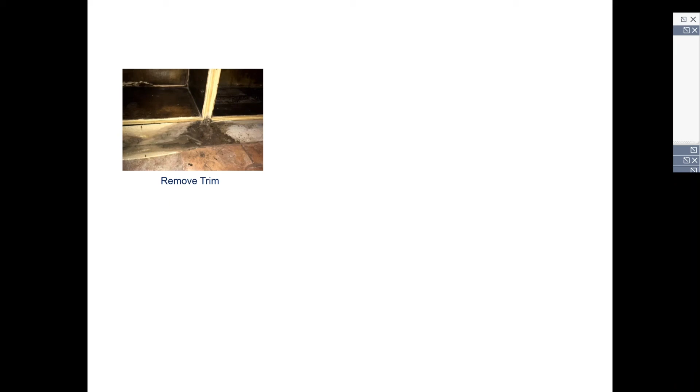Next, this is a build. So you see that there was some rotting going on in the bottom shelf, and so we decided that we needed to pull the books and pull the trim, and here's what I found behind it. Next slide. So we removed the trim. Next, just keep clicking through this, and exposed the drywall, exposed the batts, exposed the framing.

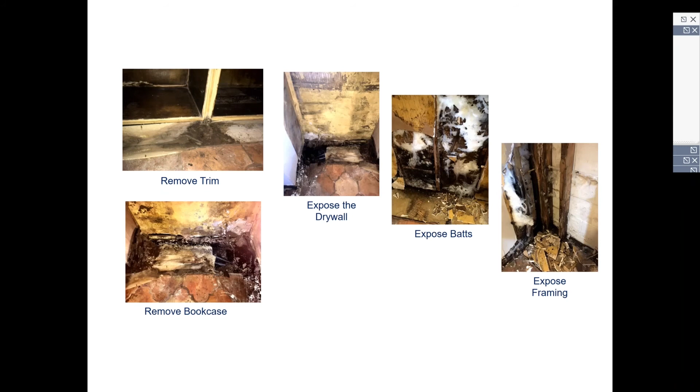This is a concrete masonry wall, and so a little bit of moisture, next, came in through a corner, and you see that the heat pump slab was sloped toward the corner. So when it rained heavily, we would get just a little bit of water, but it had no potential for drying out, and it caused all of that damage you'll see in the next slide. A little bit of water can create a lot of havoc in a home.

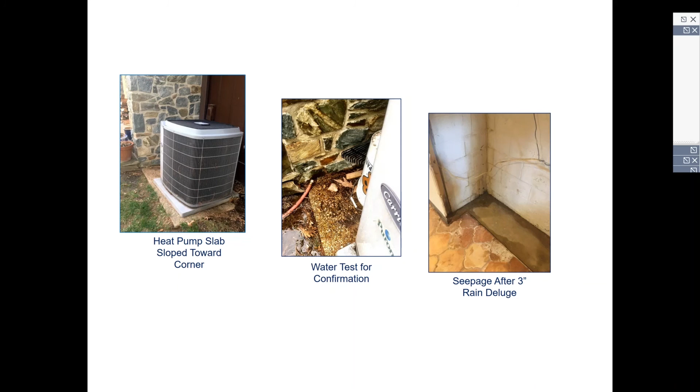Next slide. Yeah, so that's what we experienced, and that's what a lot of people have in their homes, these kinds of factors that can negatively impact health.

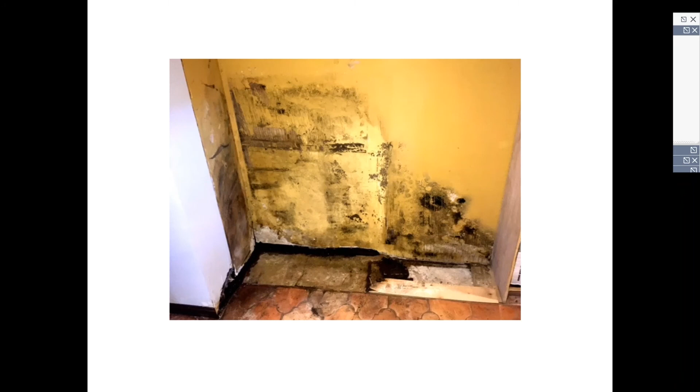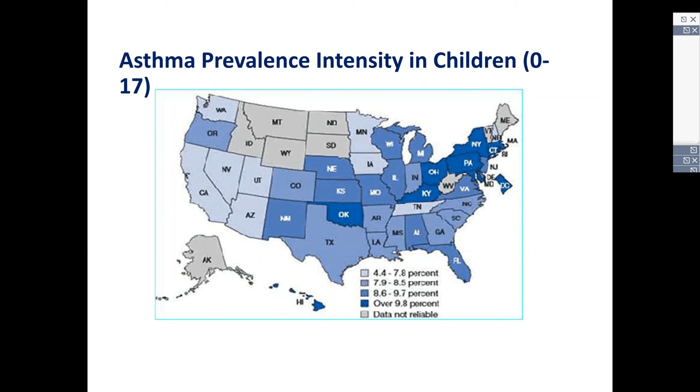And why is this a problem? If you look at, say, for example, asthma prevalence and intensity in kids under the age of 17, you see those darker states, 10% of the population has asthma, and that number is growing across the country. So we need to look at what the impacts of this are. You can go ahead and click 2 or 3 times.

One more. Oh yeah, and so the impact is that it can have a tremendous financial impact, both in terms of direct costs and also indirectly in terms of days missed in school, days missed from work when you're taking care of a child, and then of course there's the emergency room and hospital stays. So asthma is very important.

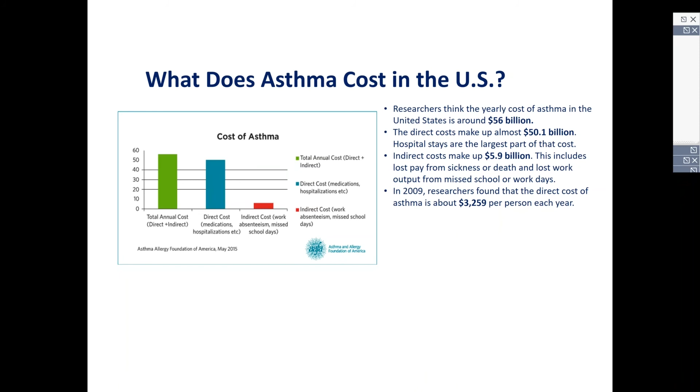We decided that we need to understand what the triggers are that may cause it or may cause the incidents to occur. Next. So with a lot of help from people in the industry, including the Green and Healthy Homes Initiative, we created the Healthy Home Evaluator credential 3 years ago and brought it into the market. Now this is a pretty high level credential. It does require a diagnostic prerequisite certification like the building analyst. So it's not something that's aimed at, say, community health workers or in-home nurses, but I'll get to that in just a minute. Next.

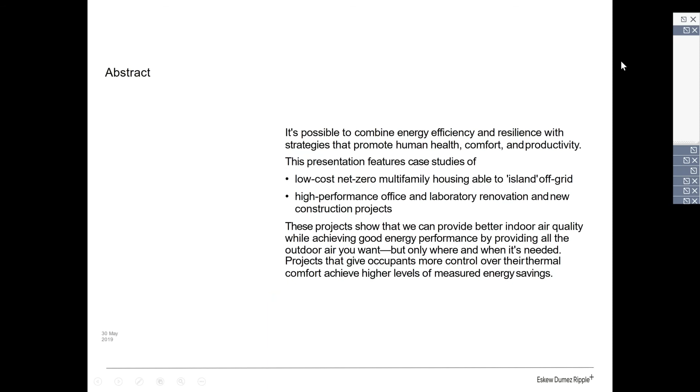Thanks for this. Next slide, please. And this is just the abstract.

We'll be getting at the end of this session to a few case studies, but because I know this is ACEEE and we're ultimately interested in issues around energy, I'll be talking about 3 cases that cover very different building types, showing that you can combine conditions that promote occupant health and productivity while still achieving pretty good energy performance numbers. We'll be talking about a LEED Gold laboratory building, a design for WELL certification office building, and a multifamily housing project under construction now that is targeting net zero with off-grid capability and Enterprise Green Communities certification.

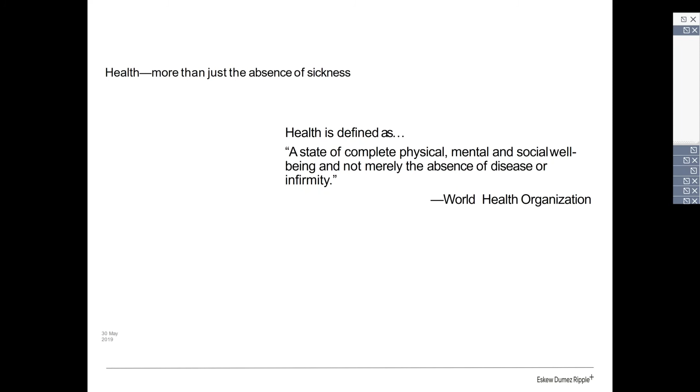Health, increasingly, is not just about the long-term implications of what health really means, but in fact what matters is the short-term, chronic, and immediate impacts on the well-being of building occupants. That can be not just about not being sick, but about promoting well-being and productivity. We're finding as architects in our own practice that it's this impact on day-to-day productivity and sense of well-being that is really driving what we used to call sustainability and energy performance—the energy performance comes along for the ride if we design for health.

So just to review, what do buildings need to promote occupant health and productivity? Obviously, we want to provide for thermal comfort.

This is especially important in larger buildings, not so much single family homes. We are constantly battling facility operators who think the way to make a great building is to put plastic boxes over all the thermostats and keep those pesky occupants from touching things. Our experience has been that your occupants are smarter than your building management system. They know when they're comfortable, and if they're messing with the thermostats, it means your building is malfunctioning. As one building commissioning agent told me, in 30 years of practice he's never had a case where making people more comfortable made the energy use go up. It almost always makes the energy use go down.

The second issue is good air quality. What we're finding is that the standards in place for ventilation and so on are actually woefully out of sync with the current best research on what it takes to promote good occupant well-being. We obviously want to control relative humidity, because high moisture situations can promote mold, and mold is the leading cause of lawyers in the built environment, so we need to pay attention to that. For laboratories, which are typically very high ventilation and therefore high energy use building types, we find that giving occupants control to set ventilation according to what's appropriate to the work they're doing can have huge energy impacts that improve their comfort as well as improve the energy performance.

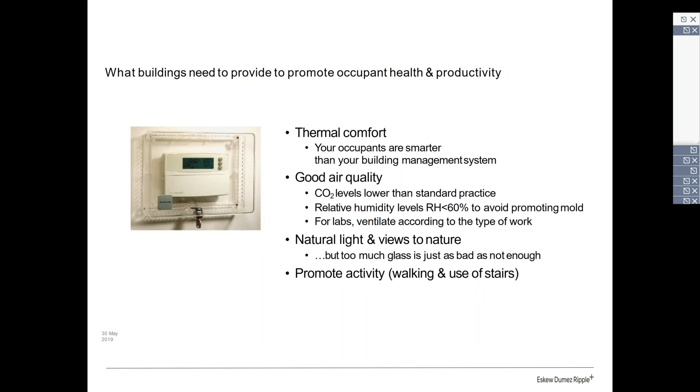We also know that buildings need to provide natural light and access to nature, but architects who try to do this by just making glass boxes are actually making the situation worse. Finally, one that's a little more subtle is promoting activity. We're such a sedentary, overweight society, and things that can promote more physical activity in buildings, like just making stairs more inviting places, can make a big impact on occupant health.

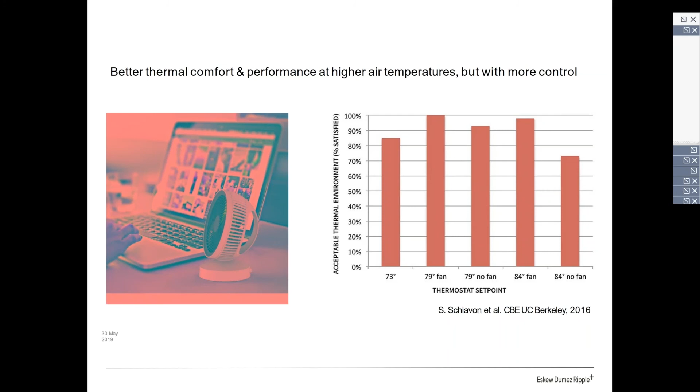There's some recent studies that are quite interesting on that thermostat issue we talked about. Berkeley has shown that building set points where the ambient temperature is much higher than what we're used to thinking of as the comfort zone actually promote the highest level of occupant satisfaction and the highest productivity in offices, as long as we give people control of the rate at which air is moving in front of them. At the desk, if you have individualized small fans, which are very low power, a few watts each, you can deliver much higher productivity and comfort with an ambient temperature in the summertime of as high as 79.

And in fact, recently in the news, it's become an issue - a gender equity issue. A recent study coming out of Germany shows that the test scores of men might be higher at lower temperatures, but women are especially significantly negatively impacted, even at the same level of clothing, due to differences in metabolism. So the best thing to do is provide a good ambient temperature and give people control over the rate at which air is moving over them, so they can control their perceived cooling and temperature. That also happens in air conditioning dominated office environments, to save energy.

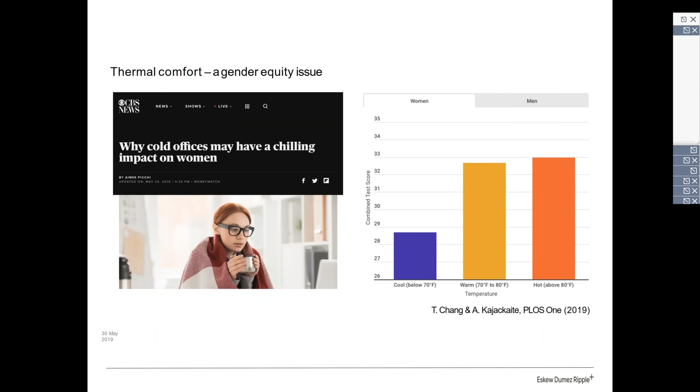The other surprising bit of research that's really changing the conversation is sometimes called the Harvard study or the COG-FX study, the cognitive function study. At a facility in Syracuse, New York, they built uninviting windowless cubicles, but underneath each one they were able to manipulate the carbon dioxide levels, volatile organic compound levels, temperature, and airflow, then study how knowledge workers perform as you vary these conditions in beautiful double-blind studies.

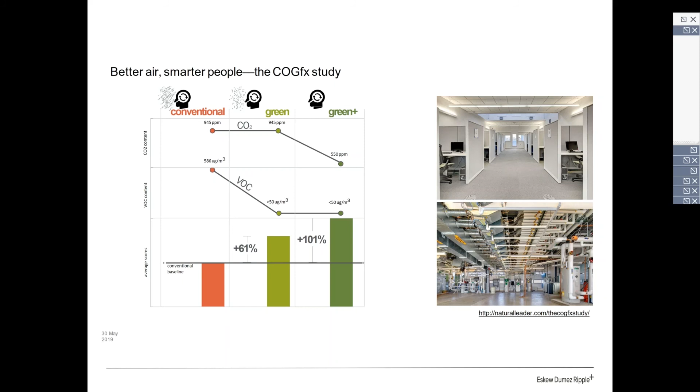And the results are stunning. They found that performance on the most challenging knowledge worker tasks can be almost doubled if we get the VOC levels lower and get the indoor carbon dioxide levels lower. If the middle bar is green, which is typical of what you'd achieve with a good LEED certified building, green plus is that plus a higher level of outdoor air to lower the ambient CO2 levels.

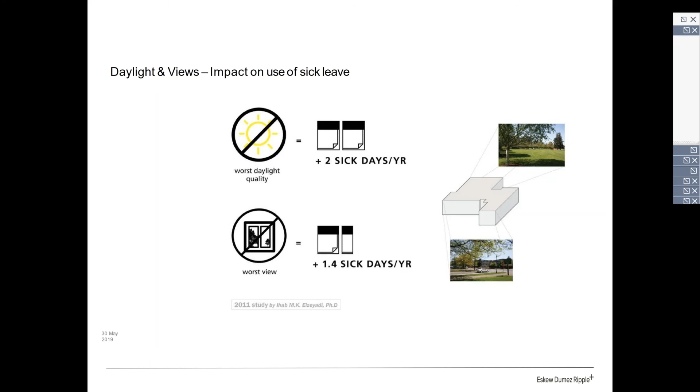And productivity is both higher, and the rate at which service can be provided to clients is also higher when you provide good daylight and good views.

And this translates also to schools, where controlling for all other influences, they find that students progress 20 to 26% faster year over year on tests in the rooms that have the best daylight and views than those that have the least.

And daylit stores experience higher sales. It depends on what the business type is and what the price point is in the stores, these impacts vary.

The financial benefits of these are significant—20 years ago, we talked about daylighting as a way to save energy because we could turn down the electric lighting. Daylighting is a way to unleash retail sales and worker productivity, and the energy savings just come along for the ride. So some case studies just to show this in action.

At the Dalney building at Georgia Tech, this building is opening next month. It's an office building where their original perception was they were building a parking deck, which would free up a lot of area currently covered in surface parking and make a nice green space in the heart of their campus. But then they were sort of embarrassed to have a parking deck up against their eco commons, so they said, well, we'll put an office building, glue it onto the side of the building.

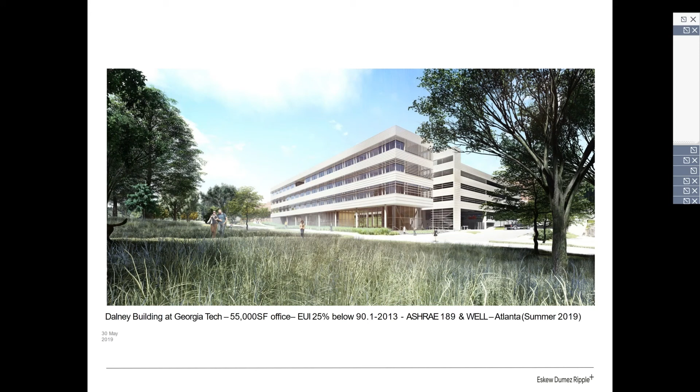But what we did was, instead of laminating a building, we actually proposed pulling the building off from that parking deck, allowing things like cross ventilation and daylight from two sides on this incredibly long, relatively thin bar. So it's an open plan office workplace with just 40 feet from window to window, allowing for great daylight and great ventilation.

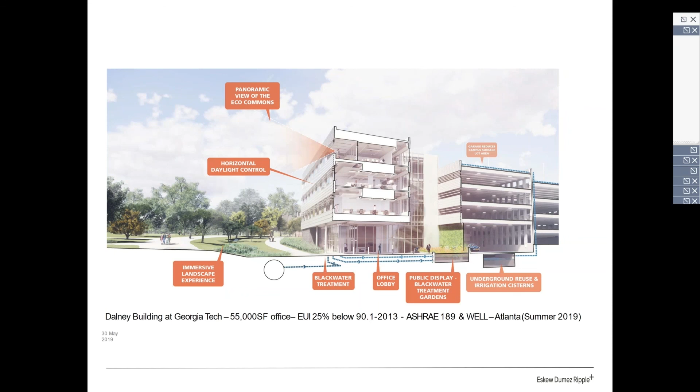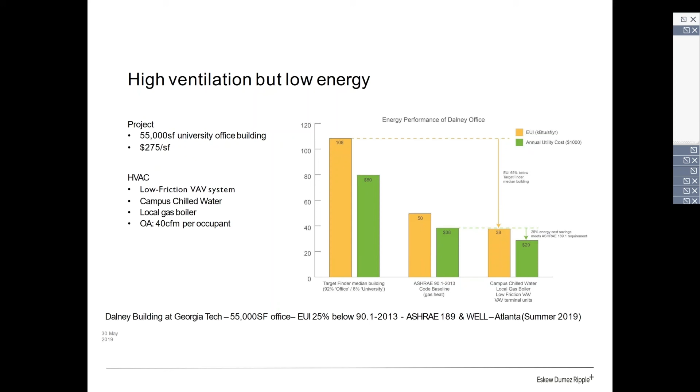Through an application of what we call a low friction VAV system—the kind of mechanical system they're comfortable maintaining at the campus through central plant people—by designing larger ducts with slower turns, along with other measures, we achieved a very high level of environmental performance, including qualifying for ASHRAE 189 certification as well as WELL certification, even though this building provides more than double the typical amount of fresh air per occupant. And it's doing it at a cost of just $275 a square foot, which is very low for an academic office building.

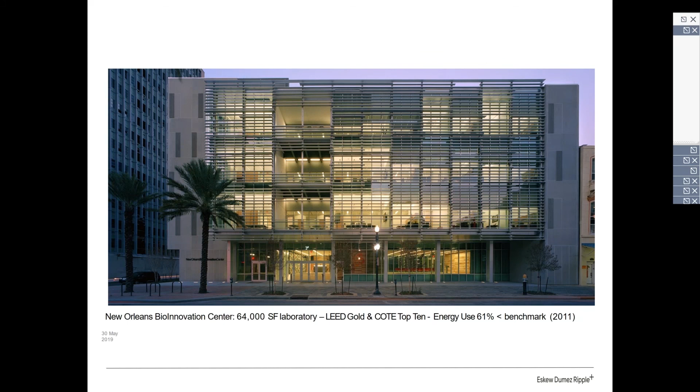The Bioinnovation Center here in our home city of New Orleans was completed in 2011, and it earned a COTE Top Ten award as well as LEED Gold certification. Its measured energy use is 60-61% less than typical laboratories, even though we live in a very humid, hot, challenging environment.

And laboratories tend to use lots of air because to keep people safe in case somebody accidentally tips over a container with some solvents in it while doing their work, when they should be doing it in a fume hood, sometimes people walking around a lab might spill something. So the easy thing to do is to just move a whole lot of air, sometimes as much as 12 air changes per hour.

However, this is a biotech startup incubator building where there's all kinds of different research happening. And so in each 1,000 square foot laboratory compartment of this building, we actually allow each tenant to set the ventilation policy appropriate to the kind of work they're doing.

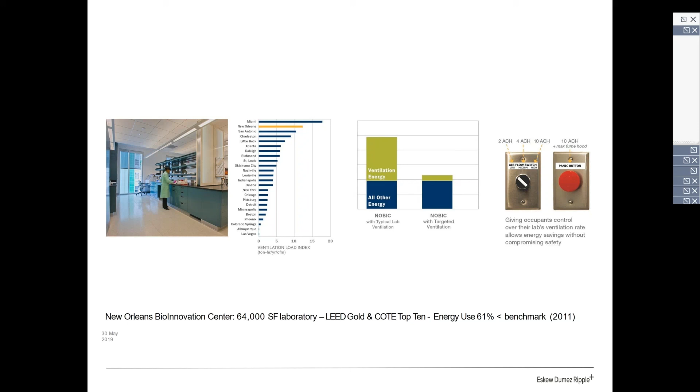As you can see in that middle bar chart, the energy implication of allowing the people who need a lot of ventilation to have all the ventilation they need, and those who need less to have less, allows tremendous energy savings. And in fact, the measured energy use of this laboratory, per square foot per year, is the yellow bar for this building, compared to the typical lab is about one-third.

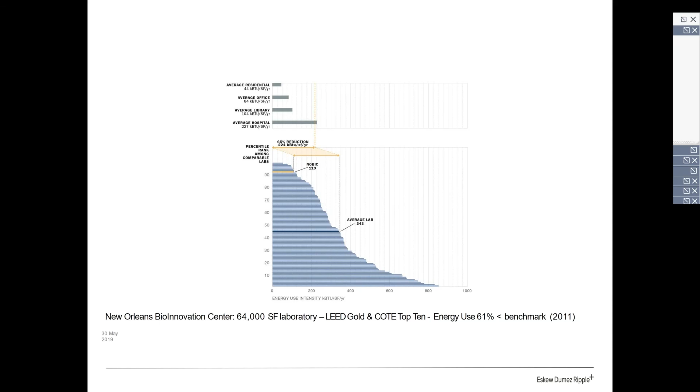And laboratories, as we say, are huge energy users compared to things like residences, offices, and so on. So these kinds of decisions of empowering users to make smart choices has huge impact.

Finally, this is our net zero multifamily housing project currently under construction here in New Orleans. This is a 50-unit apartment building targeting supportive housing for veterans who maybe get undergoing care at the local VA hospital. And so the idea of losing power, which happens a lot here due to heavy storms, could put people's health at risk.

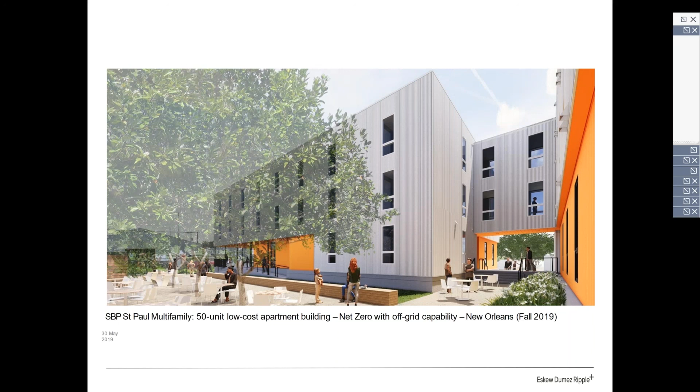We came up with a plan that said, instead of a typical energy use of a building or even Energy Star certification, we developed a package of measures on mechanical systems and building envelope that could cut that energy consumption in half.

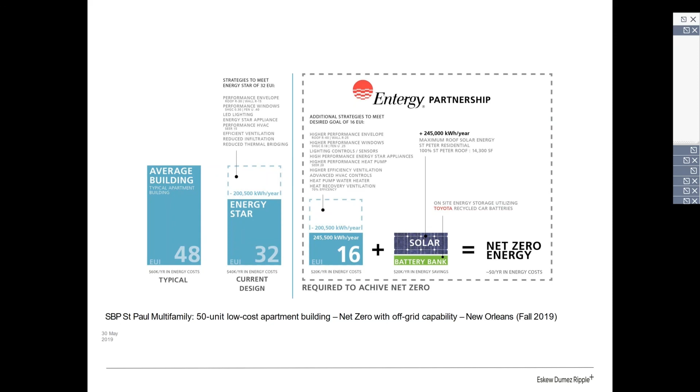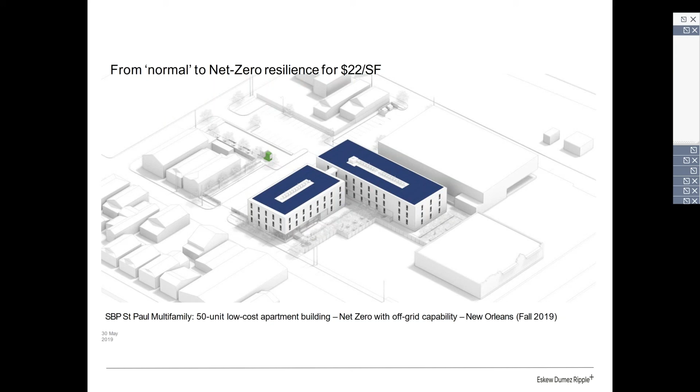And we said, once you've done that, you could actually just cover this 3-story apartment complex with solar panels very affordably, and then in fact make the whole building able to island off the grid during power outages. So this building is net zero and resilient based on this. And the total cost increment for that was only $22 a square foot. So it's really incredibly affordable due to the kind of changes that are undergoing in the market today.

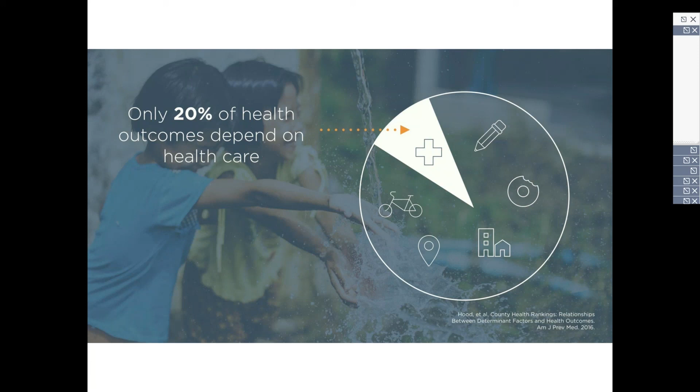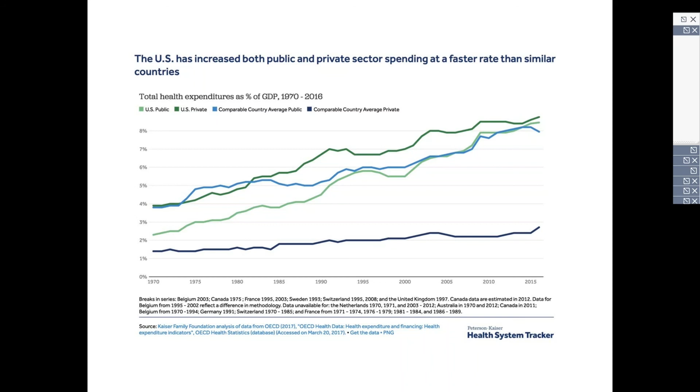But as many of you know, and as was mentioned in our first presentation today, we spend a lot of money on healthcare in the U.S. And it's pretty insane when you think about how much money we spend, even though we know that actual increased access to healthcare does matter, but it's not what's driving most of our health outcomes.

Many of the conditions leading to our highest health care costs are chronic conditions, such as asthma and lung disease, as well as cardiovascular disease, diabetes and cancer, many of which share risk factors around physical activity and healthy eating. Those things are really impacted by living conditions, by the way we're designing our communities, our cities, and even down to the building scale.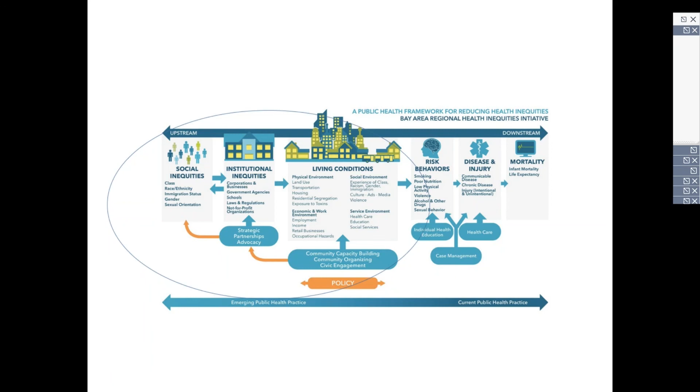Our health work at U.S. Green Building Council is really driven by a partnership we have with the University of Virginia School of Medicine, funded by the Robert Wood Johnson Foundation for about 6 years now.

We focus on creating a self-sustaining market for health promotion across both public and private sectors of the global real estate industry, in order to get at the other factors that lead to creating health promoting communities.

We get at that by using green building as a model and leveraging the success of the green building movement. There's a lot of synergies between green sustainable environments and health, but there's also an ability to be more intentional about prioritizing health within approaches to green building.

We work at a couple different scales. I'm going to focus today on the building scale in our work through LEED, but I'll also mention that we work closely with an organization called GRESB, based in Amsterdam, that has a portfolio level benchmark for sustainability performance. We've worked to create health promotion tools both for built environment project teams, as well as real estate portfolio managers and investors.

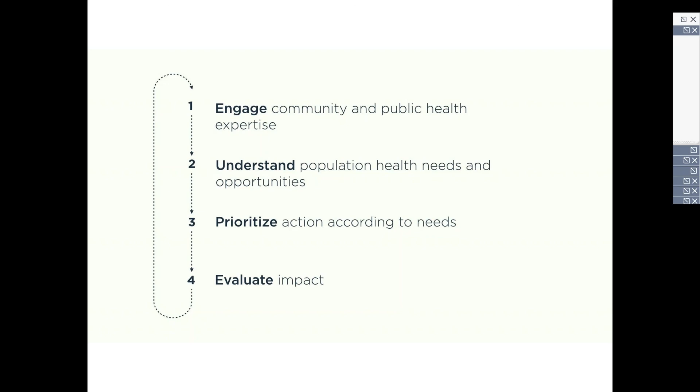This process that we created is available for use within both LEED and Enterprise Green Communities. It can be boiled down to four steps: first, engaging community and public health expertise; using that engagement to understand the specific populations impacted by the project and their health needs; third, prioritizing action according to needs; and fourth, evaluating impact. We've used this process to flip the conversation, allowing systems like LEED and Enterprise to be adapted to the specific context and needs of the project at hand.

If you look at the language available online, it seems a bit overwhelming, but boiling it down, this first step is really around engaging new stakeholders who have new types of understanding when it comes to health and human impacts of projects. We've worked with a variety of projects to apply this process, and it's relevant across a variety of space types. What we've seen is that there's often existing health expertise within the client organization that hasn't previously been engaged.

Here's an example: a medical office building in Virginia, where the facilities team worked with the community benefit team of the healthcare organization to build a better understanding of the specific health needs of the staff, the patients visiting the office, and the surrounding community, and built that understanding into their approach to LEED certification in a way that hadn't been done before.

We're also currently working with the DC public school system to do something similar. Public school districts have a variety of health experts on staff—nutrition specialists, nurses, physical education staff—but these experts aren't usually involved in the facilities discussion at this early stage. We're seeing that bringing in these new perspectives opens up new understanding and new opportunities to act on promoting health through specific building design, construction, and operation strategies.